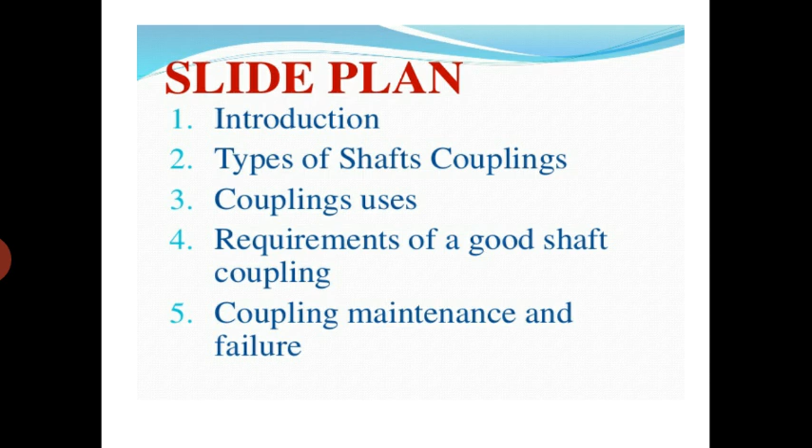Students, couplings are mechanical elements that couple two drive elements, which enables motion to be transferred from one element to another. Students, coupling, we can say, is a mechanical part which is used between two shafts to transfer motion and to connect and support two different moving elements. So that is the definition of coupling.

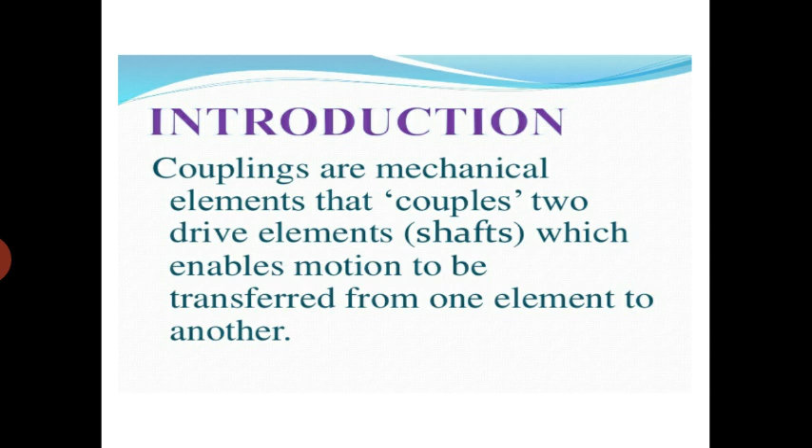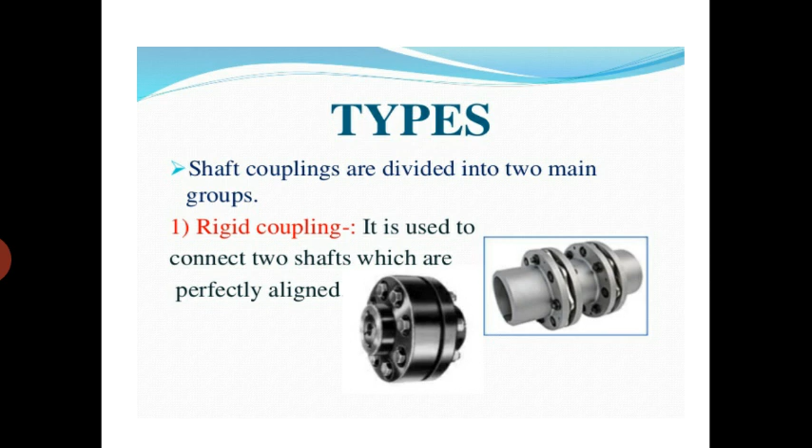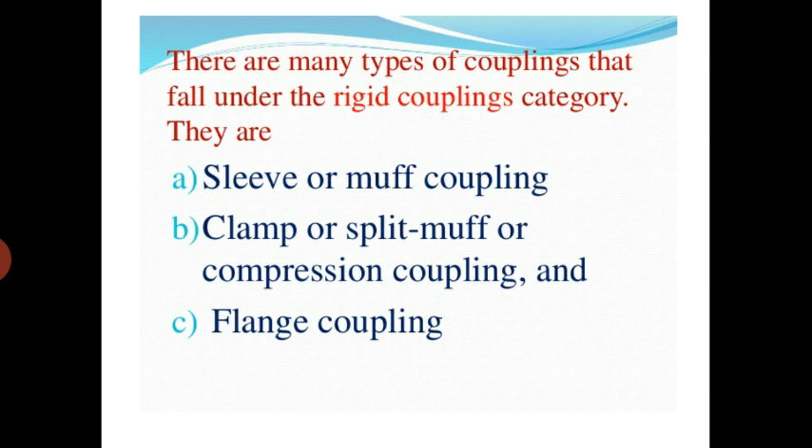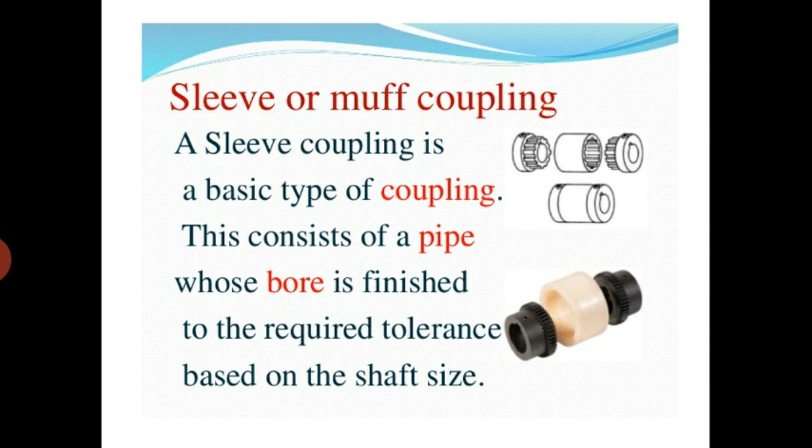There are many types of couplings that fall under the rigid coupling category. These are sleeve or muff coupling, clamp or split muff or compression coupling, and flange coupling. Students, sleeve or muff coupling. A sleeve coupling is a basic type of coupling, and this consists of a pipe whose bore is finished to the required tolerance based on the shaft size.

Next is flange coupling. One thing I want to say to students, that in your syllabus of Engineering Drawing 2 there are two couplings, flange coupling and flexible coupling. So there is no need to explain other couplings like muff coupling, sleeve coupling. So what is flange coupling? This coupling has two separate cast iron flanges. Each flange is mounted on the shaft end and keyed to it. The two flanges are coupled together with the help of bolts and nuts.

Students, these flanges are in the form of collars, and a number of holes are made in these flanges to key them by using nut and bolt. So the two different shafts are passed through the bores of these couplings, and after passing the shafts these flanges are keyed or connected by using nut and bolt.

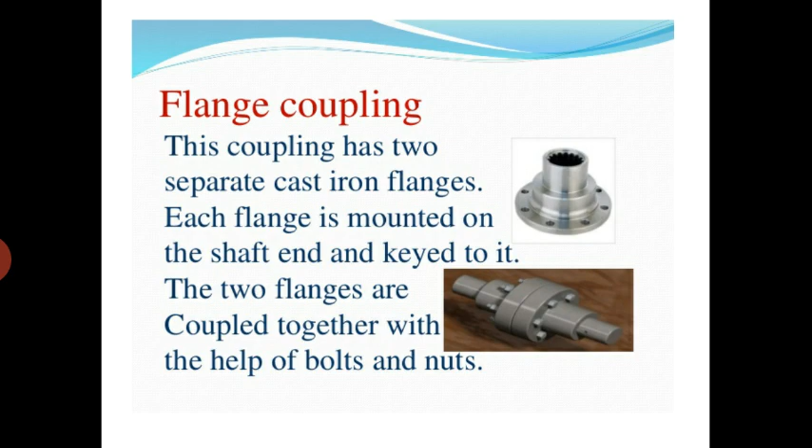Now next is flexible coupling. Students, flexible couplings are used to transmit torque from one shaft to another when the two shafts have both lateral and angular misalignment. So the parts are shown. Students, flexible coupling is such a type of coupling which is used to connect two shafts which are misaligned. Misaligned means when their axes are not meeting. So in such type of situation, flexible couplings are preferred over flange coupling, because otherwise there occurs some difficulty to transfer motion from one shaft to another.

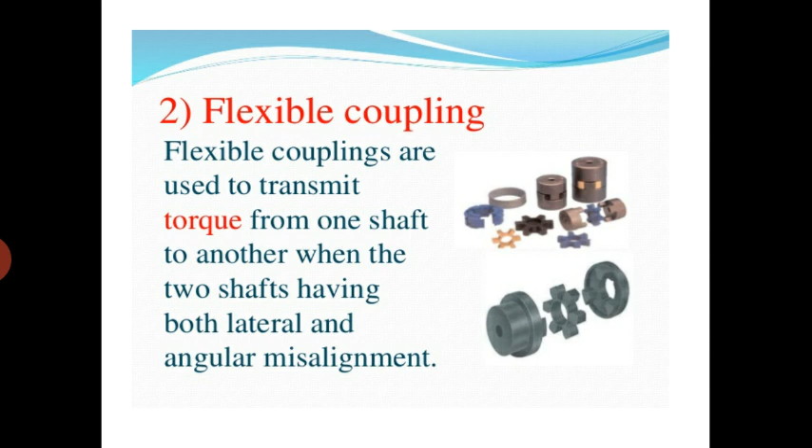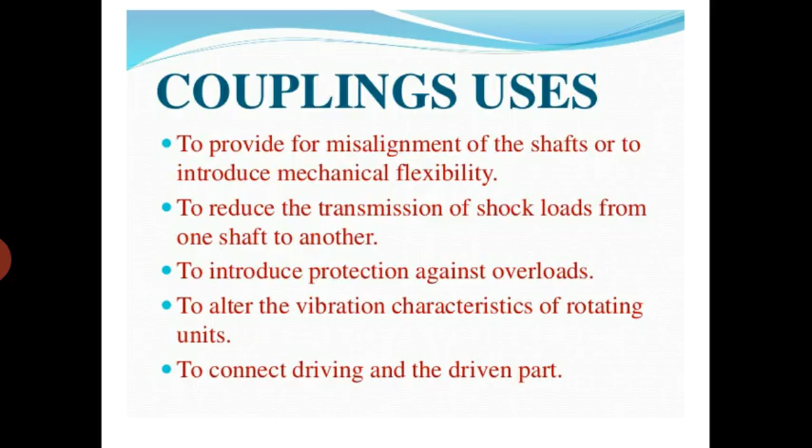Next is requirement of a good shaft coupling. Students, following are the requirements of a good coupling, and these couplings must possess these requirements. Number one, it should be easy to connect or disconnect. Number two, it should transmit the full power from one shaft to the other shaft without losses. Number three, it should hold the shaft in perfect alignment. Number four, it should reduce the transmission of shock loads from one shaft to another shaft. Number five, it should have no projecting parts. So these are the essential requirements of a good coupling to avoid failure of coupling.

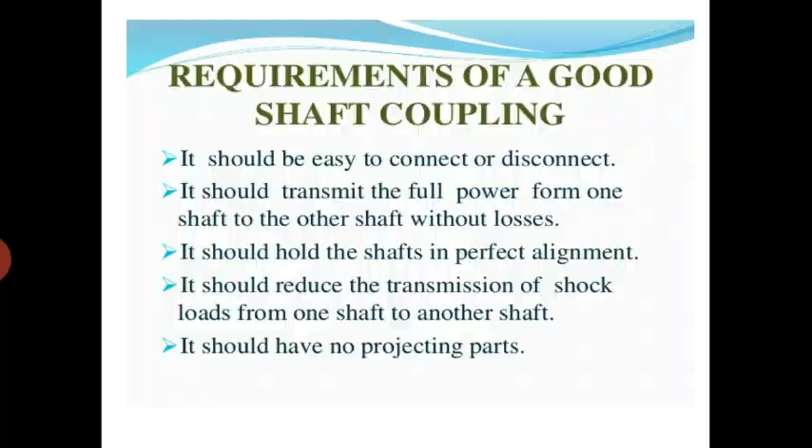So now we discuss the assemblies of flange coupling, protected and flexible coupling. So the diagram shows various parts of flange coupling. Here the main parts are hub, flange, key, diameter of shaft, and also the various dimensions. The outside diameter of hub. Students, hub is clearly mentioned in the diagram.

The outside diameter is taken as capital D equal to 2d, where small d is the diameter of shaft. Okay, so capital D is equal to 2d, and L is the length of hub.

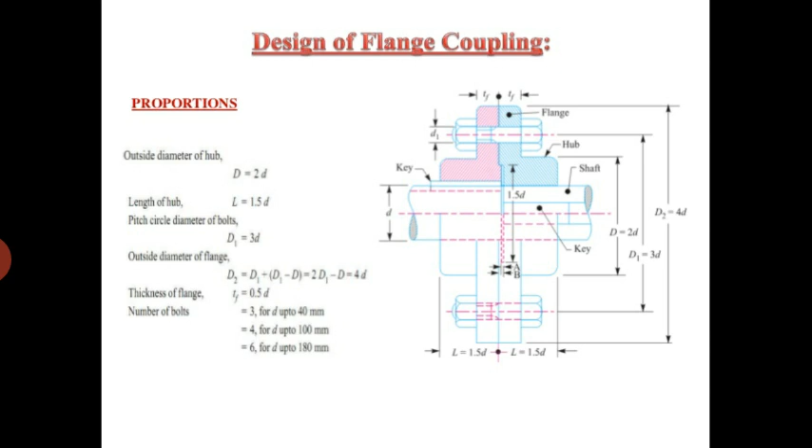So thickness of flange is equal to 0.5D. So here also the number of bolts are classified. If we are taking shaft dia of 40 mm, then 3 bolts are to be used. If shaft is of 100 mm dia, then number of bolts are 4. And if the diameter of shaft is 180 millimeter, then the number of bolts are taken as 6.

So here is the complete assembly of protected flange coupling. Students, a material list is also shown. Flange is made of cast iron. Both flanges, I will take one part as male coupling, second part female. Both the parts have material of cast iron. Nut and bolt are mild steel. Key is mild steel.

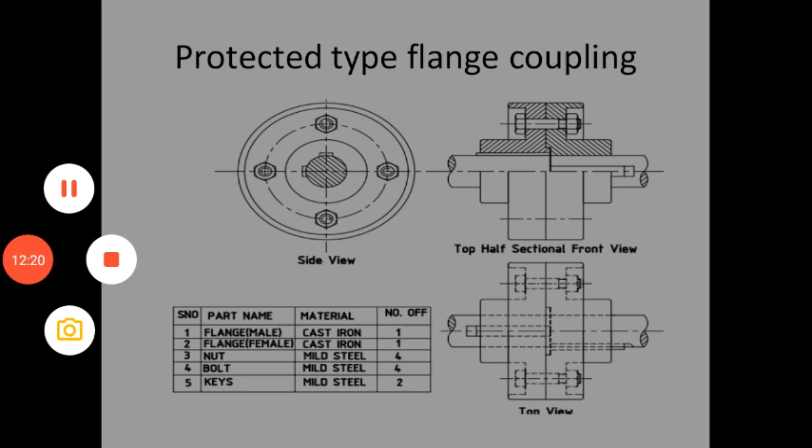So students, protected means when the heads of bolt are inside the flange surface, it is called protected coupling. So here front view and side view are shown. So now we will discuss how to draw flange coupling.

So here is the solid flange coupling. The dimensions are diameter of flange. Diameter of flange is 2D. Suppose the diameter of shaft is 60 mm, then diameter of flange is 2D, equal to 120 mm.

And the thickness of two flanges is 0.7D. That means 0.7 into 60, it becomes 42 mm. And the thickness of each flange is 0.3D. Okay. So start how to draw that assembly. First of all, draw a horizontal reference line.